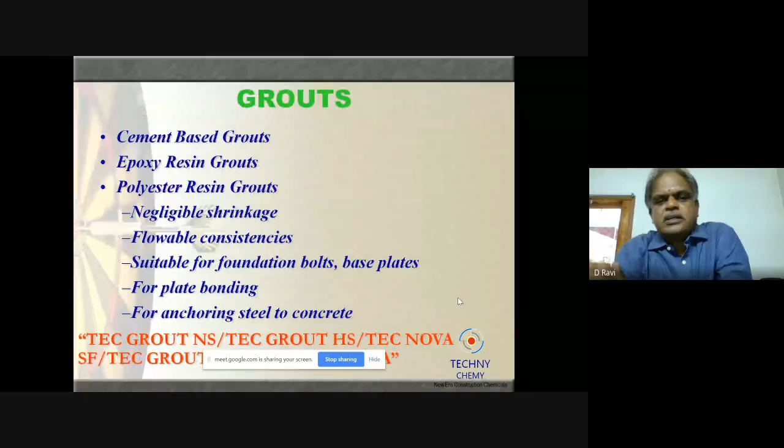Can you go for the next slide please? Yeah, see this is the picture. It is a commercial complex. You can have two portions.

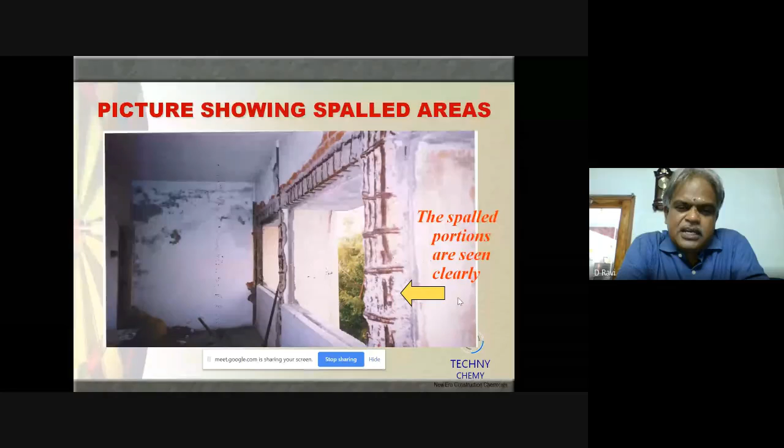Can you go for the next slide? This is a column. You can see the stirrups are not even visible to us. So that was the condition of this place.

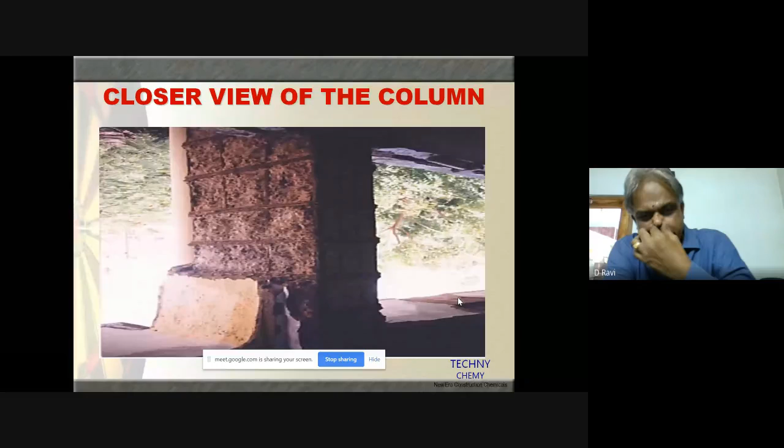Actually this is an office where normally we transfer files. When we want to give a file, we take it to the next room, go to the person and hand over the file. But here, what they will do is, they will straight away go, tap the wall, and in the wall there will be a wider crack. Within that, they will insert the file, and the person in the next room will collect the file. That was the situation of this office room.

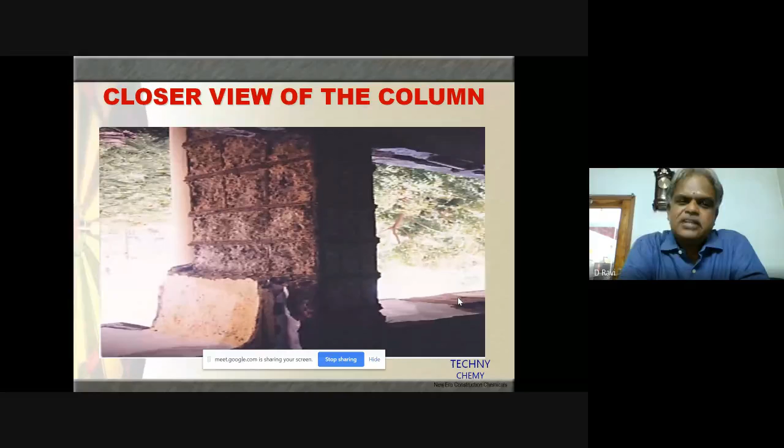We go to the previous two slides. Thank you, see the details of distress in the system.

That building had wide cracks in the columns and roof areas, and the reason was corrosion of rebars. Then there was spalling, and the entire roof was spalled.

The reason for the spalling was, as I told you earlier, places where chloride was in the water. This place where they had constructed this building was barren land under cultivation, so the chloride content was there in the water, and they had used that water.

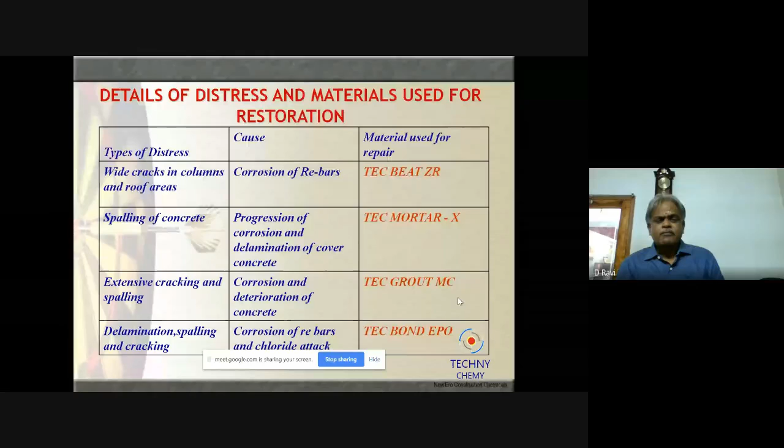Because of that there was spalling in the roofs, and there was extensive cracking throughout the entire building, and delamination. The extensive cracking was once again because of corrosion. So everything was because of corrosion.

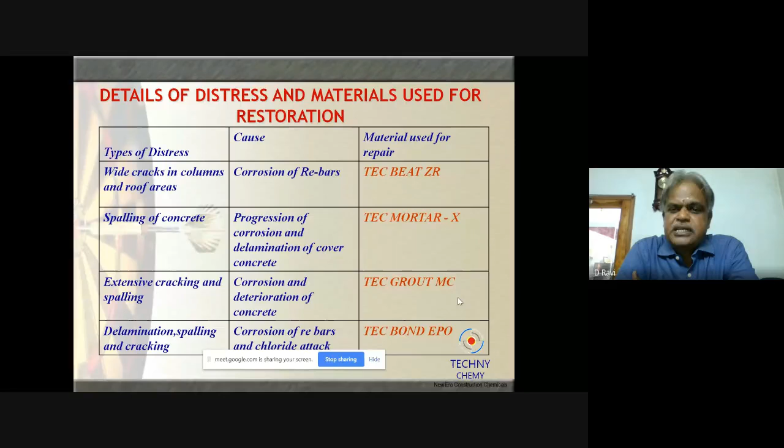And for materials, what we had used for the cracks was anti-corrosive coatings. What we did is TEC BEAT ZR, and we did the work with ready mix mortar, TEC MORTAR X. You can go 3 slides.

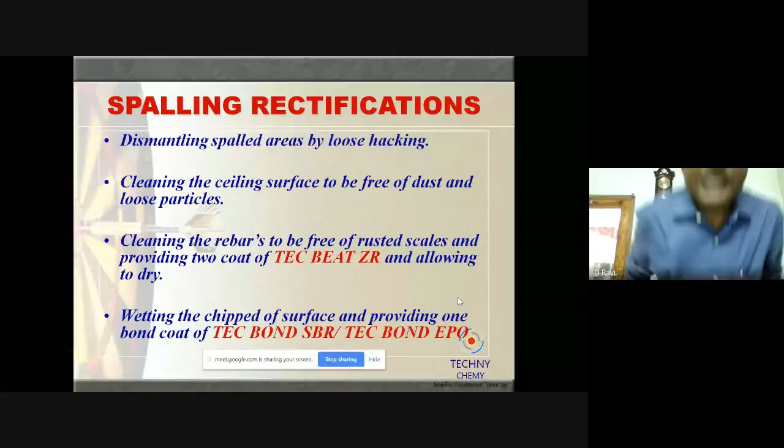So the entire dismantling was done. Here we have put a term as loose hacking.

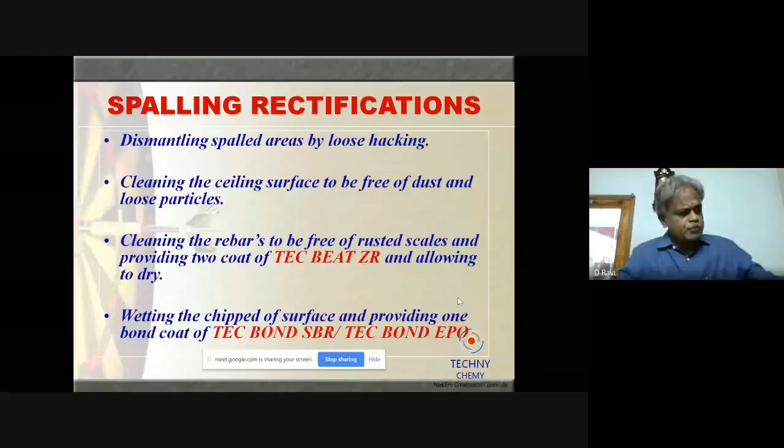What I mean by loose hacking is, normally when we find a spalling, we tend to go put a cutter and keep on breaking it. This should not be done, because wherever the portion is strongly adhered to the surface, if you start breaking it, it will cause vibration, which might spoil the good areas. So it should be a loose hacking - there should not be any heavy hacking. Just put a hammer, hack it, and whatever falls can be removed.

Then the cleaning of the ceiling surfaces. The main criteria in any repair work or waterproofing work is cleaning. Once the cleaning and surface preparation is done perfectly, 50% of the work is over.

So after the cleaning is done, the rust has to be removed from the rebar. Then we have to apply TEC BEAT ZR, which is an anti-corrosive coating, and allow it to dry for 1 day - it is just air curing. After that, we have to apply a bond coat.

There are 2 types of bond coats - one is SBR based bond coat and another is epoxy based bond coat. The benefit is, SBR bond coat is economical, whereas the working out time is very less.

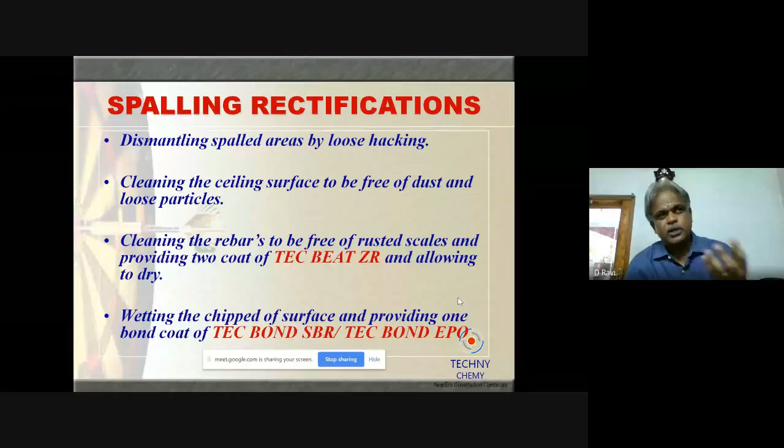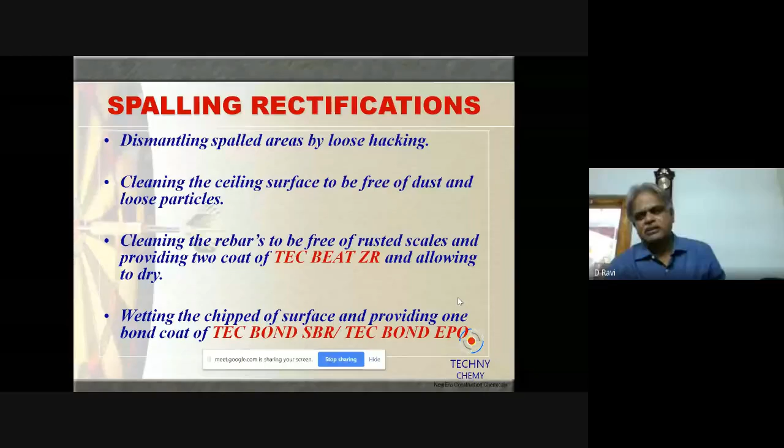Once you apply the bonding coat, you have to work within minutes, otherwise it dries and it will lead to delamination. Whereas if you go for an epoxy bonding agent, it can be applied and worked even after 30 minutes - it will have bonding capacity for 1 hour. But the cost, when you compare SBR and epoxy bonding agent, epoxy will be 3 times more. Next slide please.

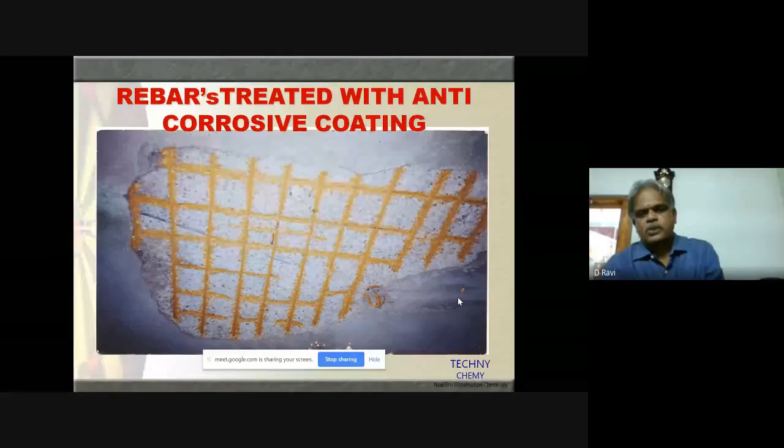Next slide, please. Yeah. This is the rebar coatings. You can see the rebar; the yellow color is the areas where the delamination was there, which has been applied with the rebar coatings. And the blue color is the bonding agent. This is an SBR bonding agent. It is not an epoxy bonding agent. It is an SBR bonding agent which is being applied.

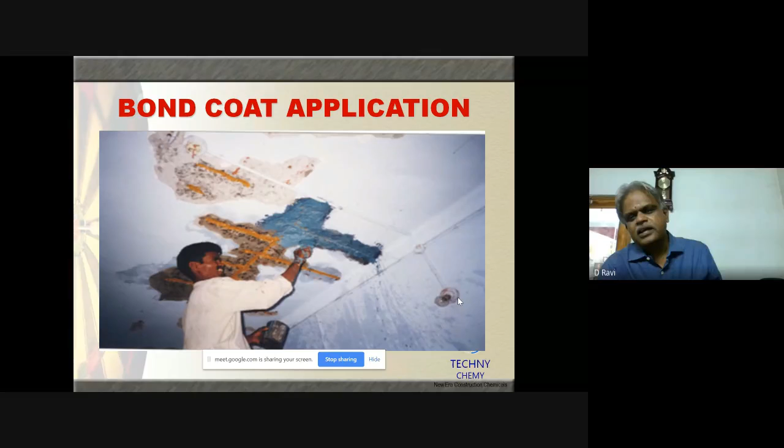Normally, for SBR bonding agent, you have 1 part of SBR, 1 part of cement with 1 part of water. So you have to mix it and then you have to apply it. Once this application is done, within 15 minutes, you do the plastering. Next slide, please.

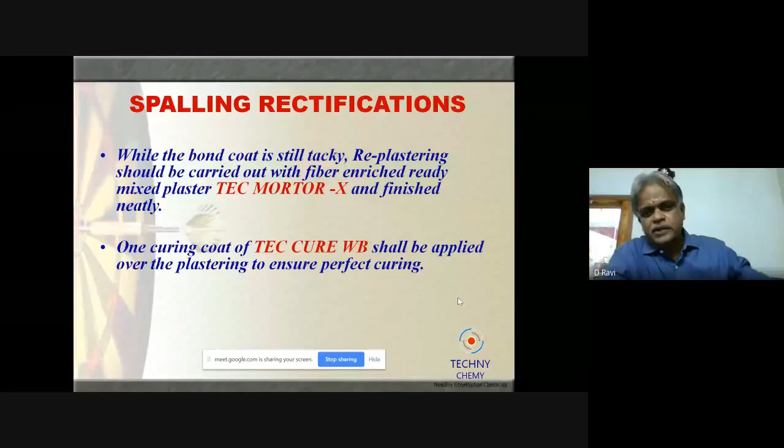This is what I was telling: while the bond coat is still tacky, replastering has to be done, and then you have to go for a curing compound, because in smaller areas you cannot do water curing. So you have to go for a curing compound. Since you cannot do the water curing, you have to go for a curing compound. Next slide, please.

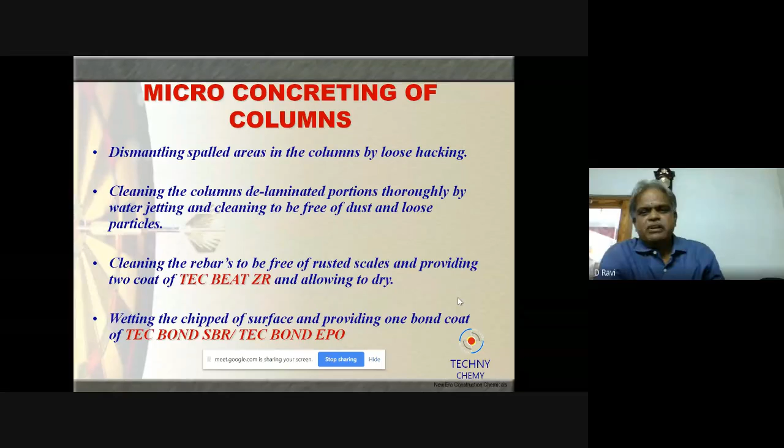See, this we have done for the roof areas, whereas when it comes to the columns, the same system has to be done up to this bonding agent and everything. The same system has to be done, but there will be a change when you are going for the columns, because in the columns you are not going to plaster. So what we will do is micro concreting. When we do the micro concreting, we will be making the column boxes. All the column boxes will be set, and after all this cleaning and every anti-corrosive coating is applied, we will go for the micro concreting.

What I would suggest is, when you go for roof and other areas for spalling rectification, you could go for an SBR based bonding agent, that will work. But when you are going for columns and micro concreting, even if it is costlier, it is advisable to go with an epoxy bonding agent. So after that, next slide, please.

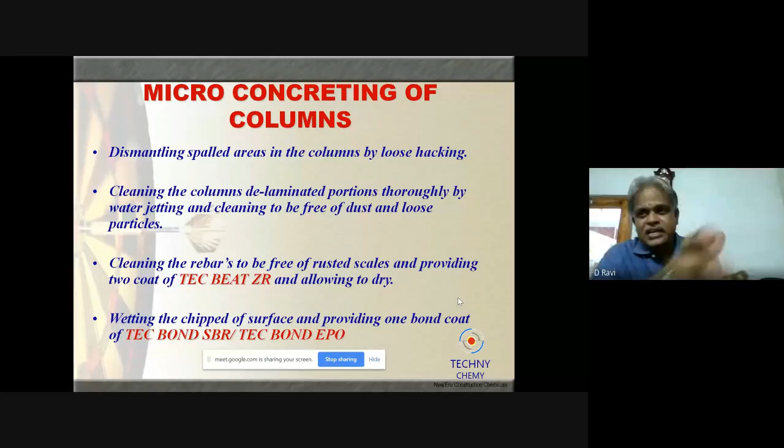Next slide. So you will be providing this micro concrete, and after this micro concreting is done, once again the treated area has to be cured as per the specification. Moreover, when you do micro concreting, the curing has to be done very extensively. Otherwise, there will be a lot of minor cracks. Thermal cracks will come because micro concrete tends to hydrate immediately. So we would suggest to do micro concreting with ice water or ice bars inside. Like that, you can do the micro concrete. Next slide, please.

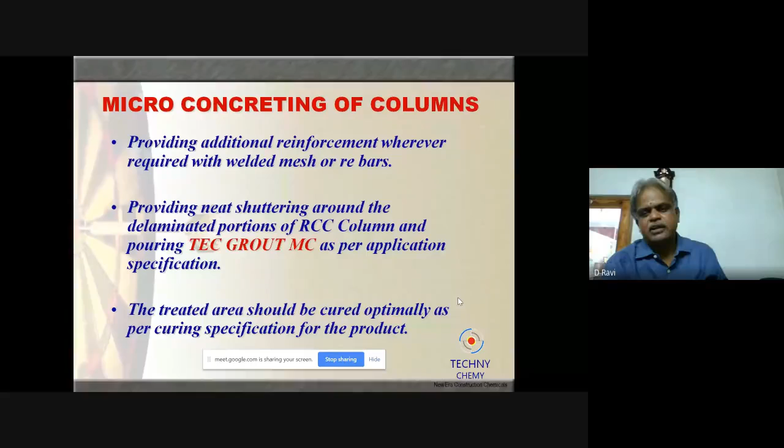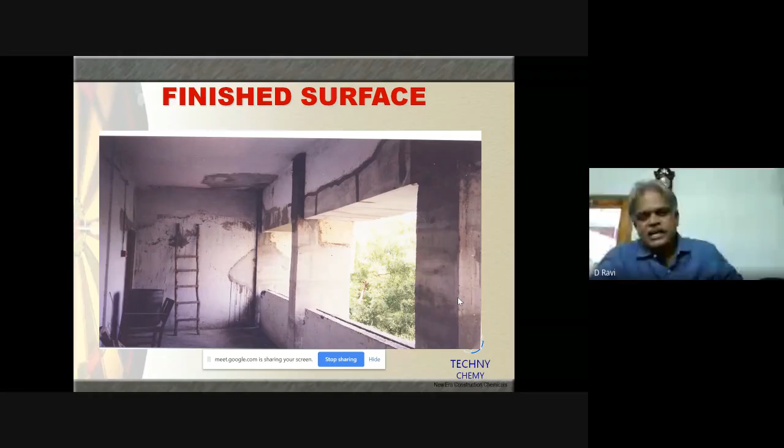This is next. See, actually, this is another problem. This structure is a basement, minus 12 feet from the ground level. The wall and the floor, everything had been grouted for waterproofing. The water pressure was very intense. What happened is it started lifting the slab.

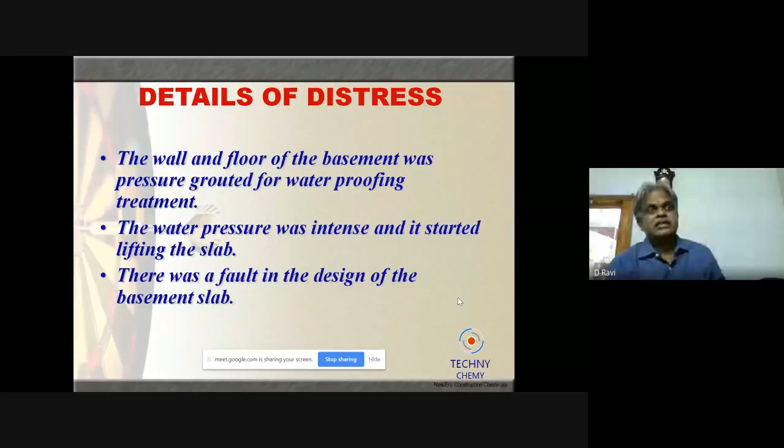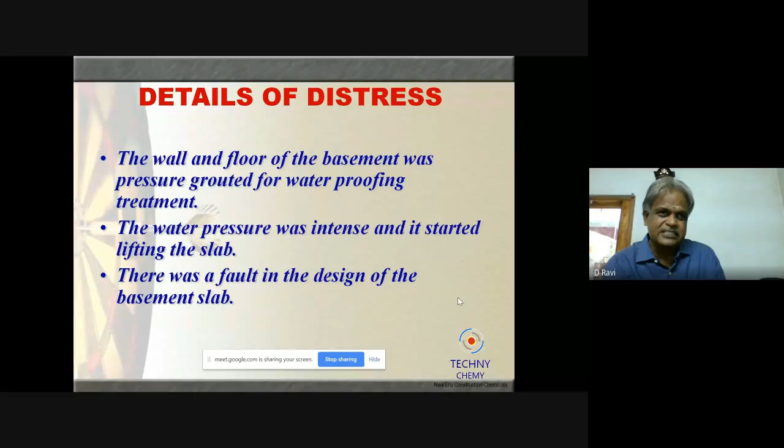See, actually, this site was carried out some 20 years back. At that time, there were no mobile phones and everything. Once my executive came around asking for the repair, he was saying that the Casuarina poles were breaking. So we were wondering how the Casuarina poles are breaking. When we went and visited the site, we could see that the slab was literally lifting. The problem was there was a fault in the design of the basement slab. Actually, the slab did not have a... next slide, please.

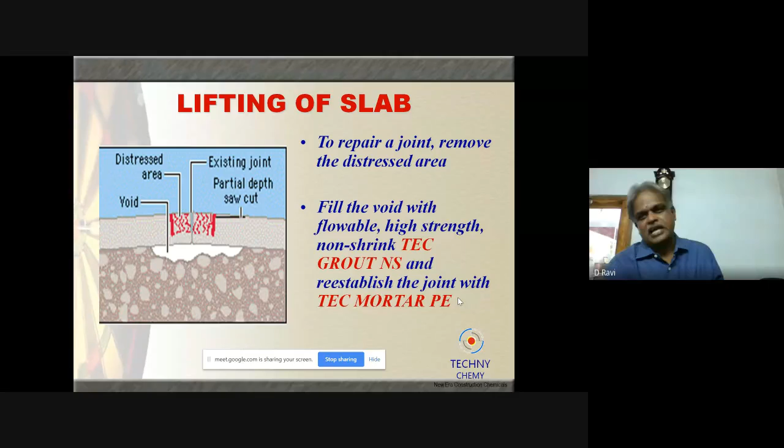So this is the thing. We have done this with the epoxy mortar. We made a beam and we filled everything to prevent the lifting of the slab. Next slide.

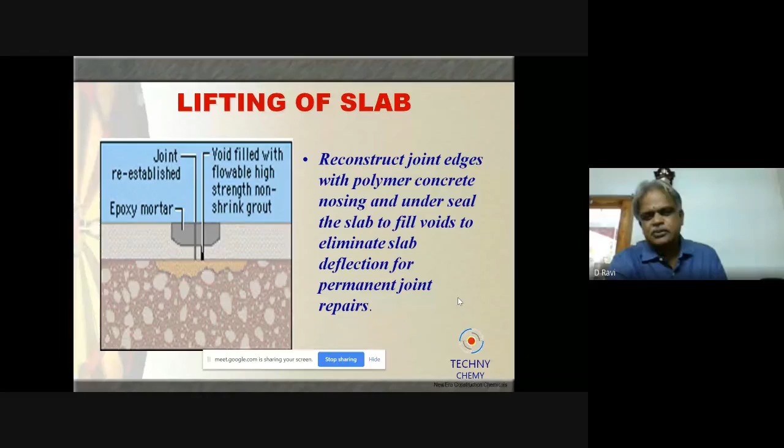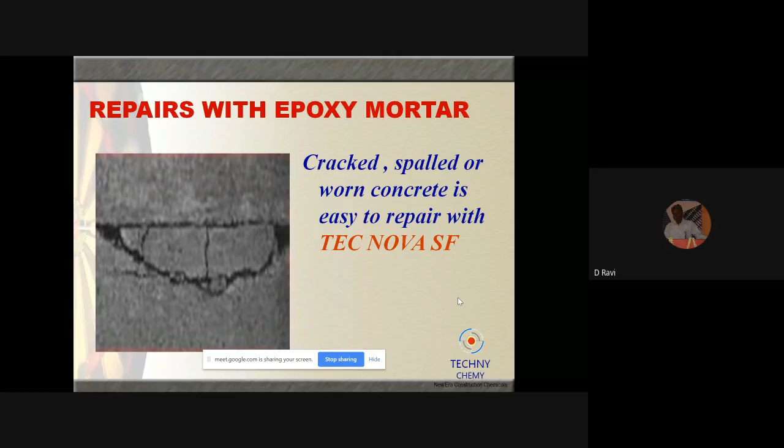This is for spalling. Earlier we saw the spalling done with the SBR and other anti-corrosive things. But this is for industrial floors and other places. How are we going to do the epoxy mortar? Normally the cleaning and other things are the same. After that we go for TEC NOVA SF, that is epoxy flooring, screed flooring. Next slide.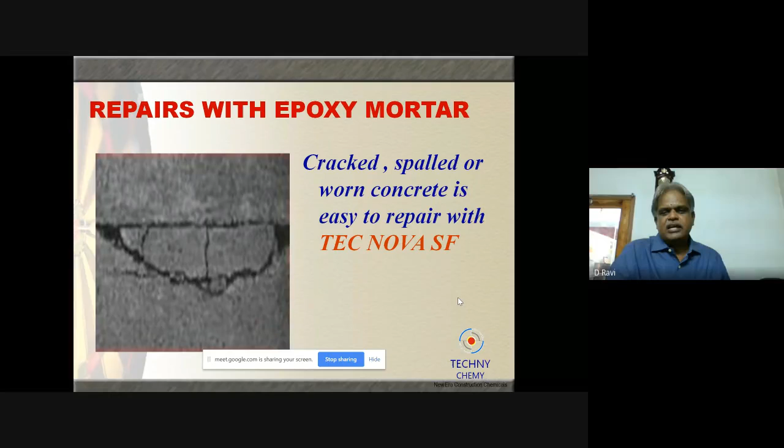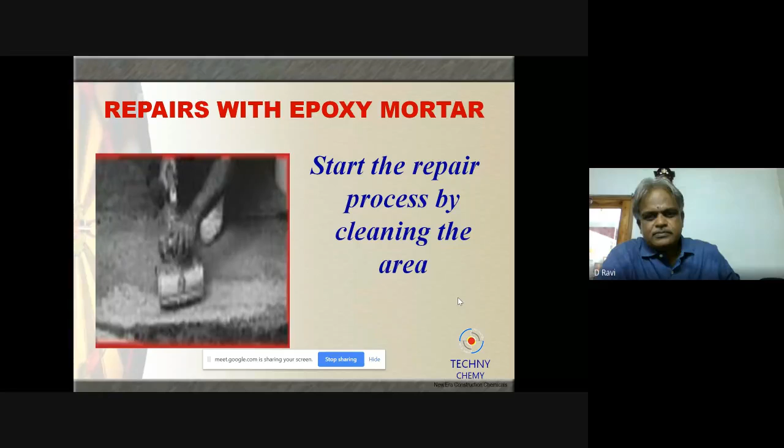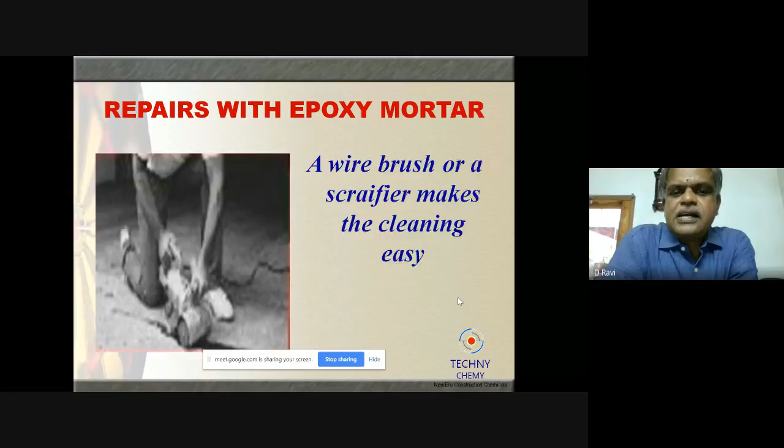So the cleaning has to be done properly. Once the cleaning is done, we apply epoxy. Next slide, please. Next slide. First, you have to fill the resin, and then you have to mix the resin with the hardener. Once it is thoroughly mixed, then you have to add the fillers. And after that, next slide, please.

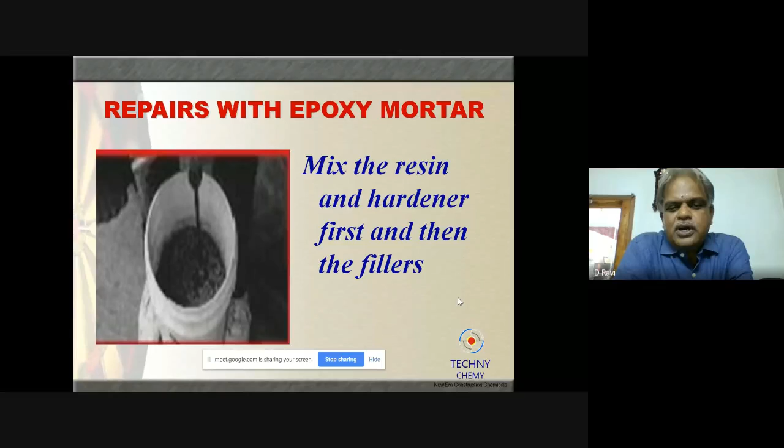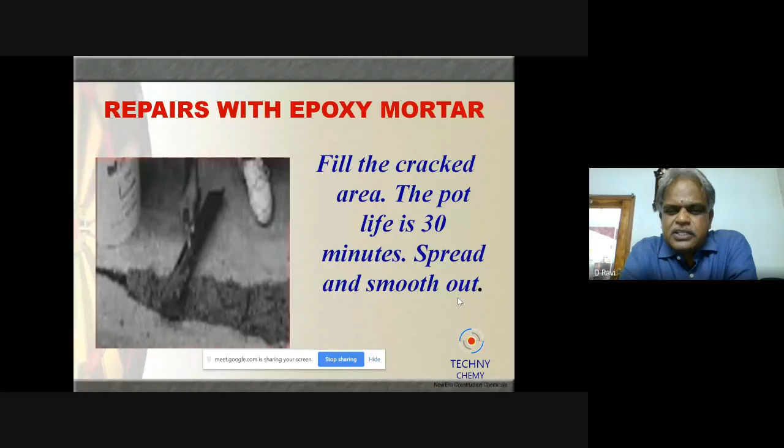After that, the cracked area has to be filled with the mortar. The pot life is 30 minutes, so before that you have to smooth it out very fast. Next slide, please. This is the patched and the finished areas. I think I have run fast in the presentation because a lot of things were not presented in the initial slides.

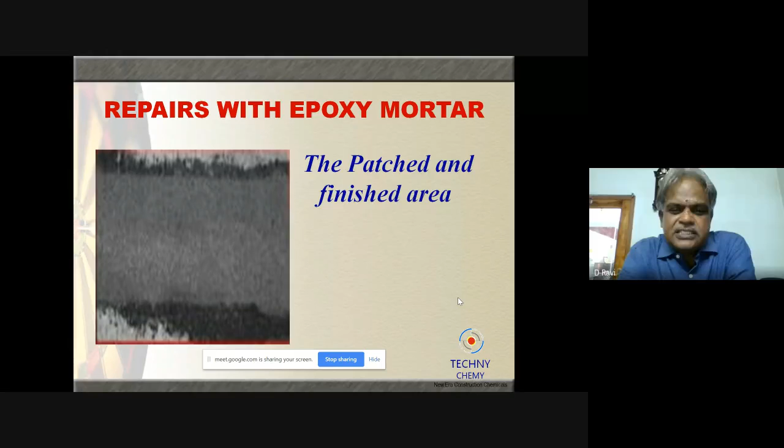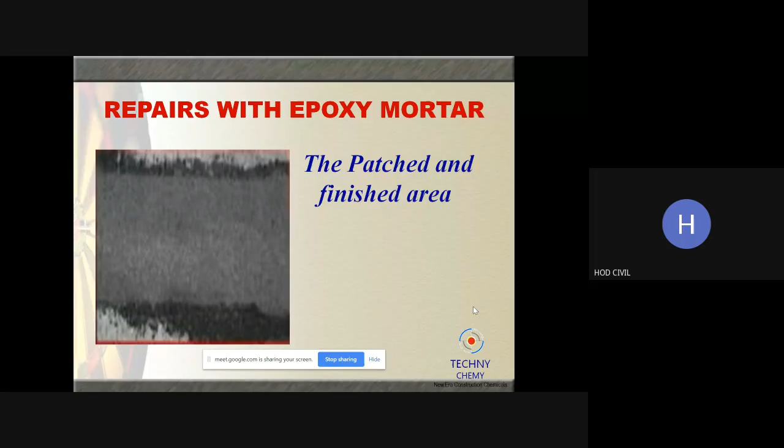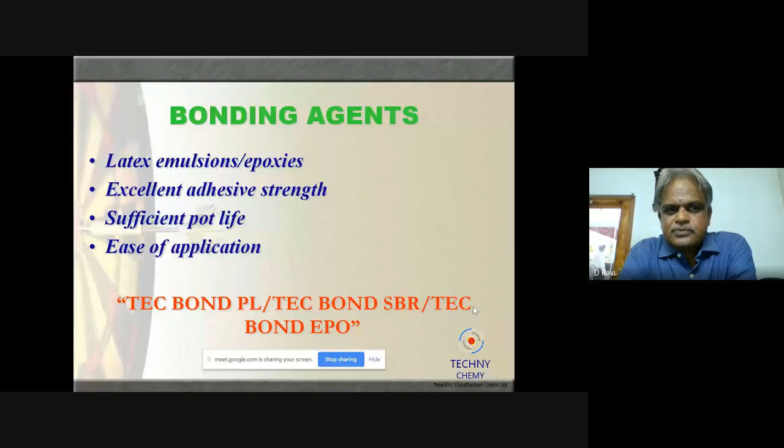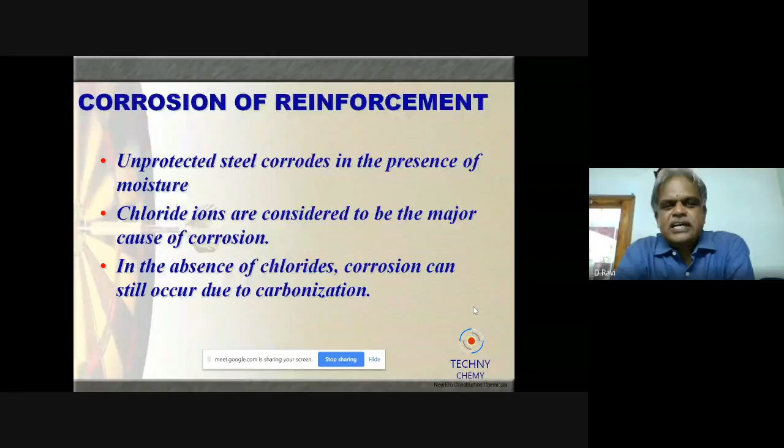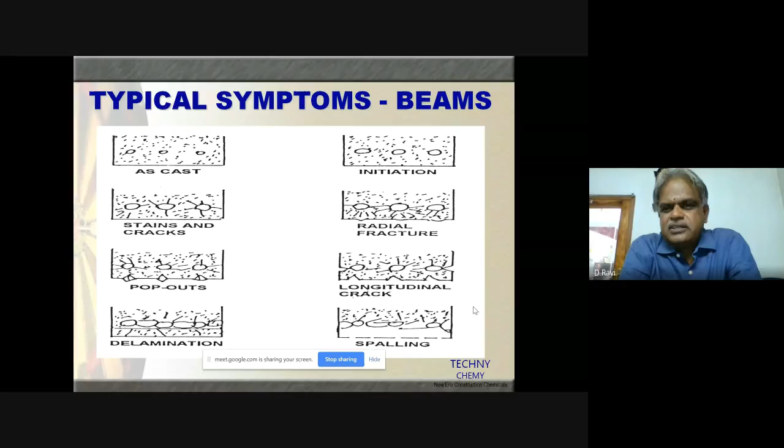This is in the slab areas. It will be a similar thing, but in the case of beams, the spalling will be lesser and the delamination will be lesser. But for slabs, the area is bigger, so the area to fall out will also be more. Actually, in the slab, I have a nice experience which I can share with you here.

There was a township near a coastal area. They were having this spalling problem in their entire township. The company had 150 people who were given the quarters; the balance people were not getting quarters. This is a quasi government, so every year, whenever they wanted to budget, they asked us for the quotation. We had given files and files of quotations continuously for 2 or 3 years. Nothing happened.

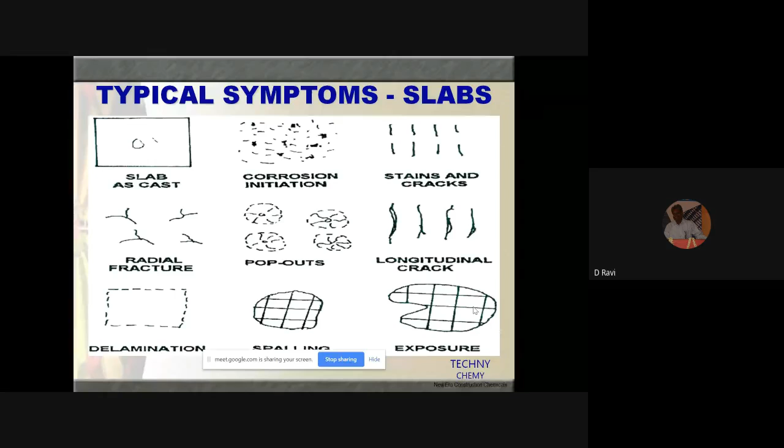For going to a bathroom or toilet, they used to follow a standard operating procedure, like what we follow now in the corona period, washing hands, gloves, mask. They could not just walk inside the bathroom; they had to go this way, that way, otherwise it would crack. One morning, there was a visitor to one of the township persons. The visitor was unaware of this procedure. He had some urgency, so he went straight inside the toilet. Unfortunately, the toilet broke open.

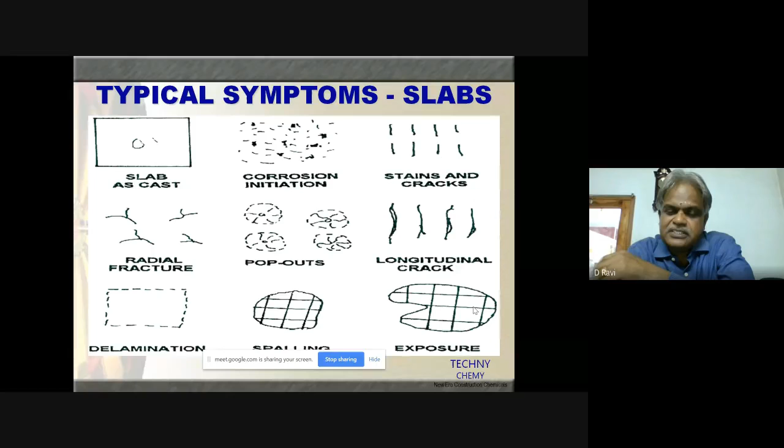The sunken portion of the second floor broke open, and the spalling entire concrete fell on the first floor sunken portion. Fortunately or unfortunately, the first floor person did not use it, and then it was a very big havoc because that person was a union leader. So there was a very big havoc, and immediately on the day our office's entire fax machine paper was over, because they were continuously faxing us to come and do the work. So after that we did the work.

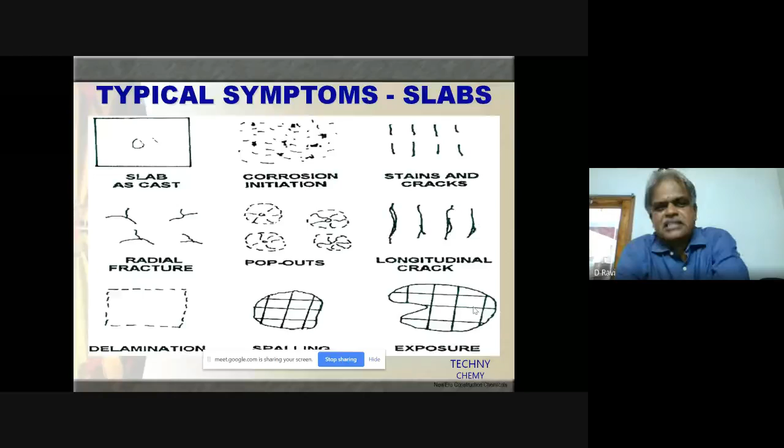The thing what we did, I have showed you earlier. So that is the thing. So the spalling, it may break, even the concrete will break, and it will lead to a lot of damages. Next slide, please. So the prevention of corrosion, the construction stage, sorry, the previous slide.

In the construction stage, we have to think of quality ingredients, which points I have told, but I had rushed through since I didn't have the presentation. And the proper placement of mix is very much important, because segregation and improper water cement ratio also tend to create concrete failure. If the water cement ratio is not proper, the compaction cannot be done. When the concrete is not compacted, there will be honeycombs. These honeycombs allow moisture inside, and the moisture makes the rods get rusted. Because of that rusting, the rods get expanded and delamination starts.

And provision of cover blocks. We have to give cover blocks. Nowadays we have standard cover blocks, but some 15 years back we didn't have any. Normally what we did was make cover blocks at the site. People may keep them, otherwise they will not. So nowadays that problem is over.

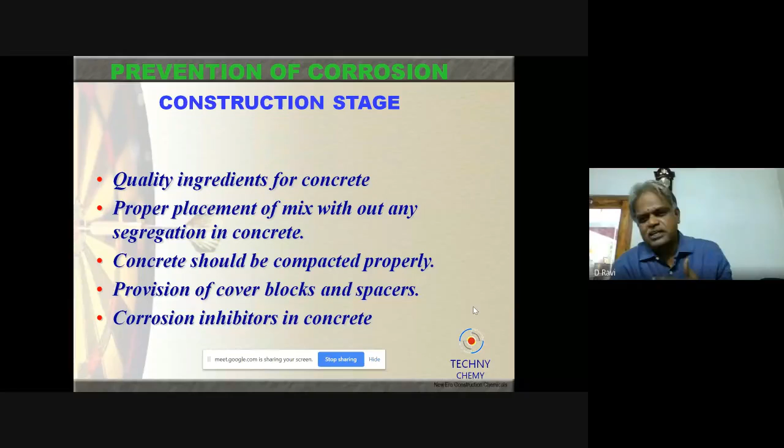And then corrosion inhibitors. Adding corrosion inhibitors in concrete is very, very economical, and at the same time it will prevent a lot of problems in the future. Only thing is we have to reduce the water cement ratio and add these corrosion inhibitors, which act as a plasticizer also. Next slide, please.

And then during the design and detailing also, we have to take care of the expansion joints and waterproofing. Waterproofing and the drainage arrangements play a major role in the repairs of structures. Corrosion in the structure is caused because of the drainage also. Wherever the drainage is given, if the water is not flowing properly, it will enter inside the concrete, spoil the rods, and lead to corrosion.

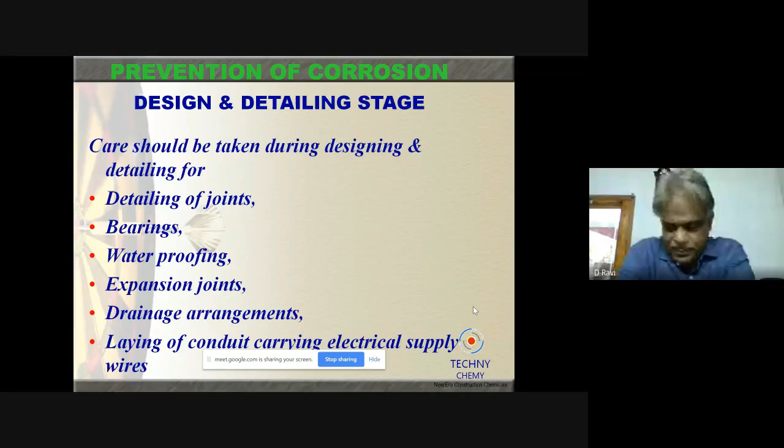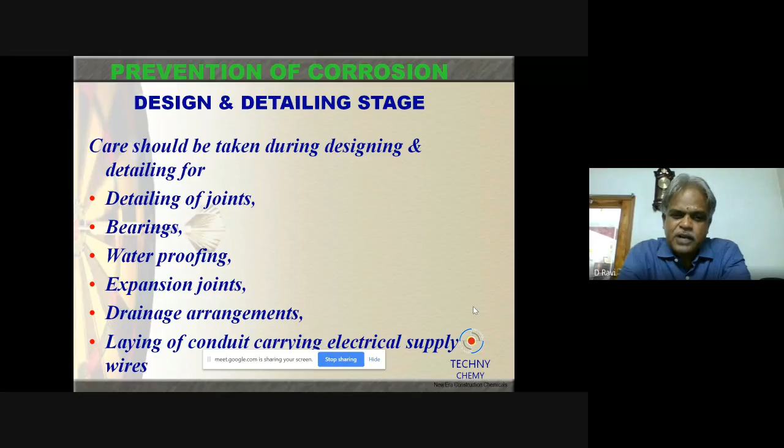And another point is we will be giving a lot of concealed pipelines inside the roof. That is another area where water tends to get inside wherever the opening is there. Because if at some point the pipe is broken, the water will get inside and it will lead to the corrosion of the steel rods. Next one.

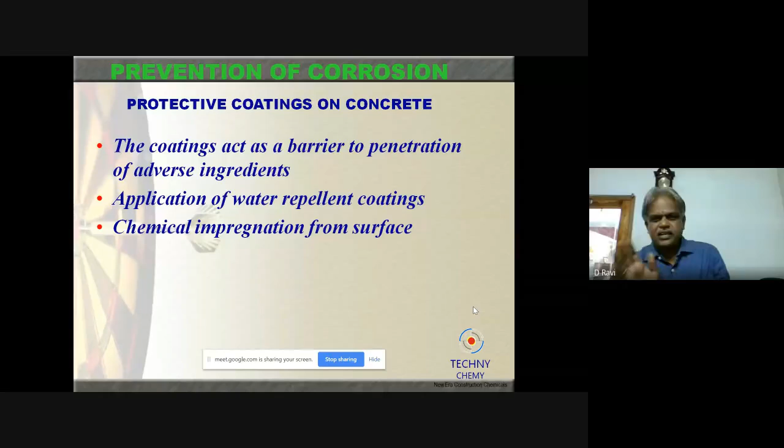So how are we going to prevent this corrosion? The corrosion can be prevented by applying coatings and water repellent coatings. Even for concrete corrosion, nowadays in buildings we can see black color sediments everywhere. The black color is only because of the carbon coming out of our vehicles. The vehicles blow out carbon, which gets deposited on the wall areas, and it tends the walls to get corroded. So this can be handled by applying anti-corrosive coatings on the wall, which will prevent the corrosion of the wall concrete.

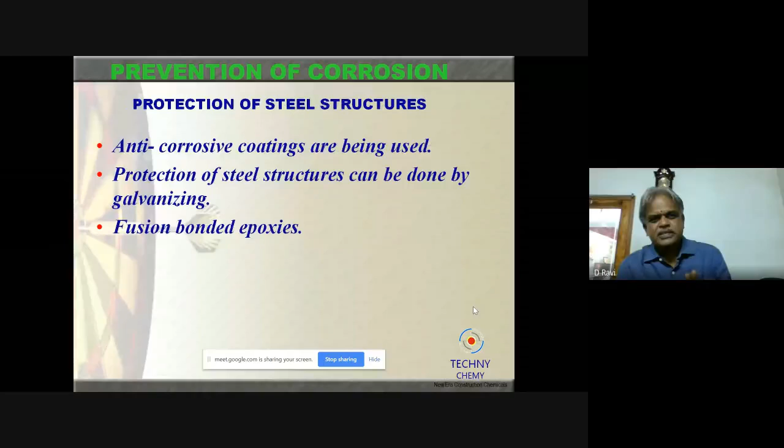Next one, please. And then for steel structures, normally we can go for fusion bonded epoxies, or we can go for anti-corrosive coatings before construction.

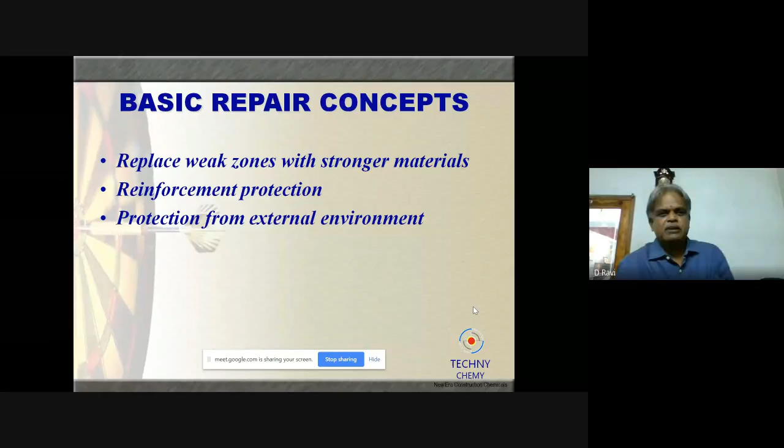The basic repair concept is whenever we do a repair, we are replacing the weaker zones with stronger materials. Whatever the weaker zone is, the repaired areas are going to be replaced with stronger materials. The second one is we are going to protect the reinforcement, because the reinforcement is the main criteria for getting the damages. And the third one is protection from the external environment, because the external environment may also cause corrosion. These are the things which we have to keep in mind before doing any repair works. Next one.

Next slide, please. Next slide, please. Dinesh, next slide. Dinesh. Next slide, please. Sir, wait one minute. Next slide. Okay, sir. Dinesh, next slide.